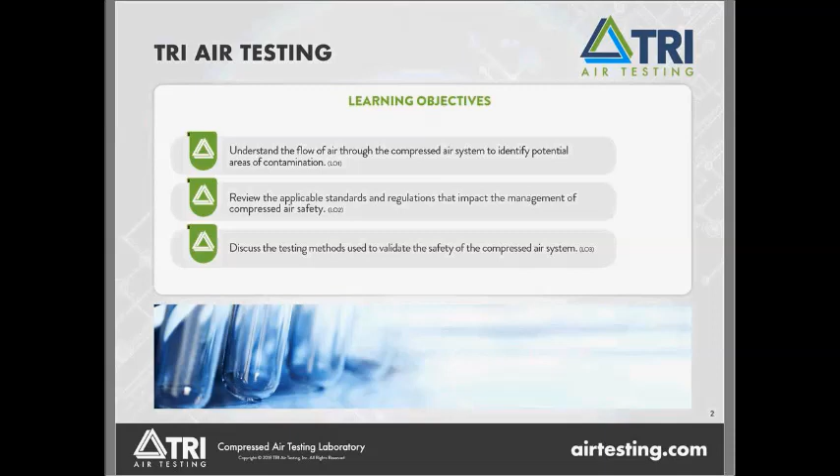So Christy already covered their upcoming events. Today we're going to talk about understanding and monitoring compressed air systems in the food processing environment. We really wanted to do it from a learning perspective and not have people out there just testing blindly because a specification or company document is requiring that testing. So to accomplish that, we're going to go through a couple learning objectives. We're going to teach you guys how to understand the flow of air through your compressed air systems, how to identify the potential areas of contamination, where those contaminants can get into the system, review any applicable standards and regulations that are currently out for compressed air systems, and maybe discuss a few changes that we know are coming around. The last thing we'll do is discuss the testing methods used to validate the safety of the compressed air system, how to collect all that data, keep it on file, implement it into your food safety plan, and have it available for any type of regulatory or CB audit that you guys may end up in.

To accomplish all that, we're going to do a quick introduction of our company so you know who we are, where we're coming from. We'll go through a compressed air system 101, show you all the components and pieces, talk of sources of contamination. We have a quick reference sheet for standards from regulatory bodies so we can see a little quick side-by-side comparison, and then we'll help you guys build your test plan by going through the test plan requirements, showing you when and where to test, how to collect those samples, how those samples are analyzed on the backside, and then how to compile all that documentation and keep it in one place.

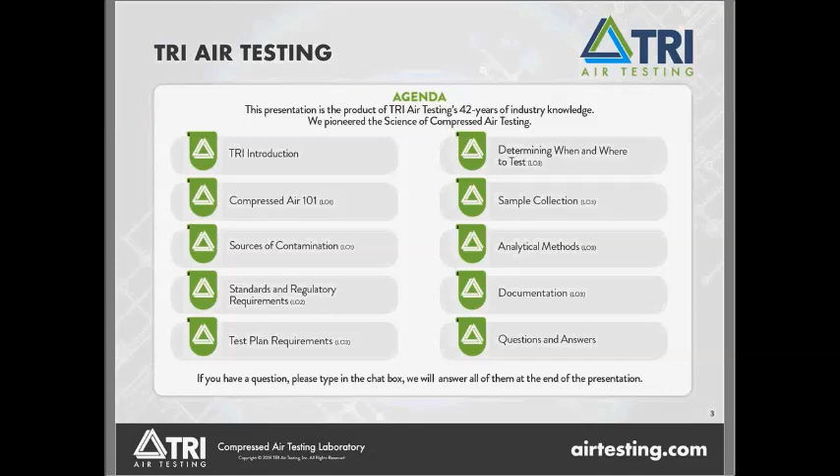So TRI air testing has been around since 1975. We started out testing primarily for the Navy doing diving air and created some proprietary sampling methods, some of which we still use today, some that we've improved on and replaced. And over time we went from dive air to firefighting air to pharmaceutical industry, microelectronics, so your wafer guys, and then I would say recently, at least for our company in the past decade, into the food, packaging, and beverage industry.

There's a saying at the top of this that says, 'Why trust the knowledge of a brickmaker about jewels?' It's from a book called The Richest Man in Babylon, and the whole idea of the story is a guy works hard, saves a bunch of money, and then invests with a friend of his who's a brickmaker to buy a bunch of jewels so they can make some quick money. And it turns out the guy who makes bricks for a living doesn't know much about jewels, and they get a bunch of colored glass and end up with a worthless handful of beautifully shiny beads and nothing more.

So we always tell people, there's a lot of talented people in your organizations. You work with a lot of other customers, but even a guy that knows environmental and ambient air sampling doesn't understand the differences to the compressed air system. There's some unique characteristics of compressed air we'll discuss today, so just take what we say with a grain of salt. If you've been told other things, we're happy to try to clarify that for you.

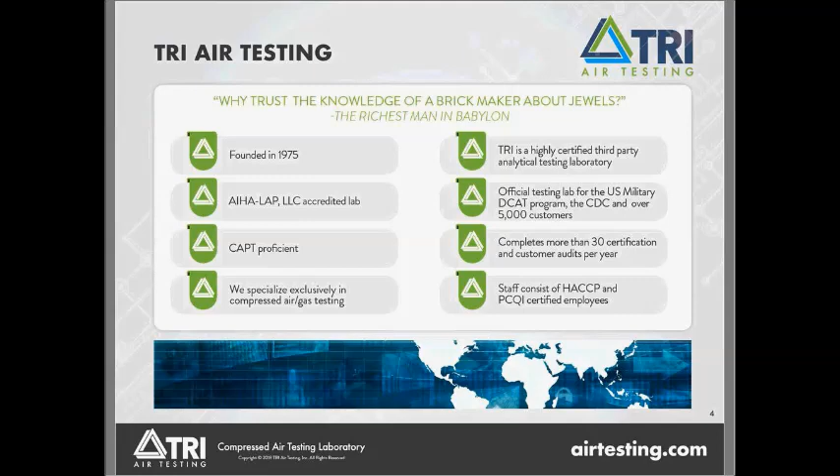TRI is very committed to learning and staying at pace with our customers, trying to understand their needs. So our staff, from sales down, we have people trained in HACCP, PCQI, very familiar with the SQF, FDA codes to assist you guys while you're trying to get answers.

So this is the point where we're going to jump into the bulk of the presentation. Like I said, the purpose here is to teach you guys and to do learning. So some people who already have a little knowledge of compressed air, this will start a little elementary, but stick with us, we'll try to get through it pretty quick. I just want to make sure everyone has that good basis, foundation knowledge for the discussion that's going to happen in the next 20 to 30 minutes.

Every compressed air system starts with one or multiple compressors. You can have 2, 3, 10 compressors, and they can all feed into a single system. Sometimes it's for redundancy, sometimes it's just for capacity. When testing, it's important to consider the number of compressors to make sure they're all online or cycling online to allow any sources of contaminants to be captured. If you have a single compressor feeding a single tank, you don't have much to worry about. If you're a larger facility staging 4 or 5 compressors, we have to take that into consideration.

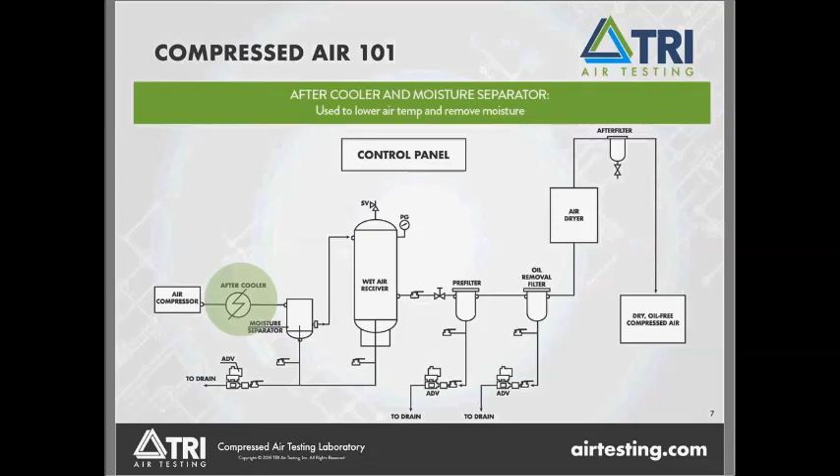So we hit our aftercooler, cool the air enough that our moisture separator and our receiving tank, which are your next two, can handle it. The receiving tank will help remove the water by allowing the air a chance to cool down as it cycles in and out, and then it'll condensate and everything will come down to the bottom of your tanks, and then run through these drain lines, hopefully with an automatic drain valve.

It looks like any other valve in a system, but it has a glass vial at the bottom with a fill line on it, and that fill line is an indicator that it's overfull. If that happens in your system, you'll start passing moisture or oil or whatever it's collecting down the line potentially.

Most plants have automatic drain valves. They can get stuck, so hopefully your maintenance guys have a maintenance check for that. If we find you have a moisture issue, that's generally one of the places we start looking to try to figure out what's going on.

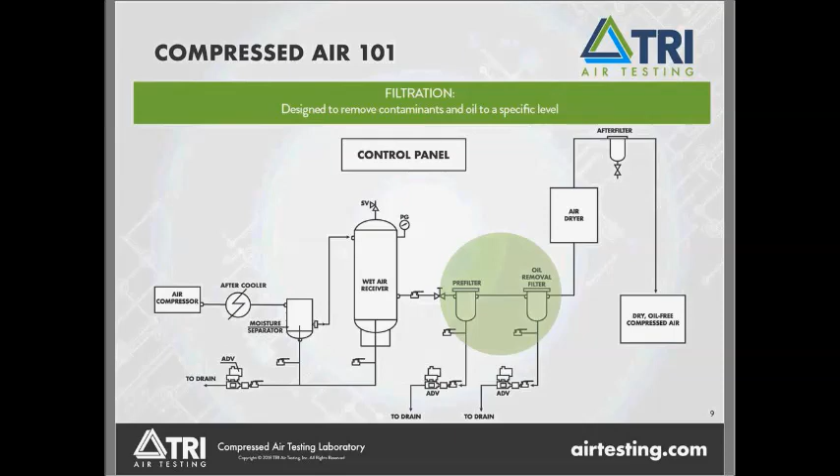Once the air is sufficiently cooled through all your moisture separators and aftercoolers, it'll run you through your first set of filtration. Filtration is designed to remove contaminants. Primarily you're looking at removing particulate, both viable and non-viable, as well as removing oil from the system.

Once you get the bulk of the contaminant removed and the air cooled, you'll hit your final dryer. The dryer is to get it down to your design characteristics. Typically we see two types of dryers in food plants: you'll see either a refrigerant dryer or a desiccant dryer.

These things can be multiple stages and can get a little more complex, but the basic ones are just a simple refrigerant dryer like an air conditioner in your car or house, or a desiccant, which is just a bead material that helps remove moisture. Once we get it dried out to the appropriate level, that's when it actually enters into your piping that runs out into your plant.

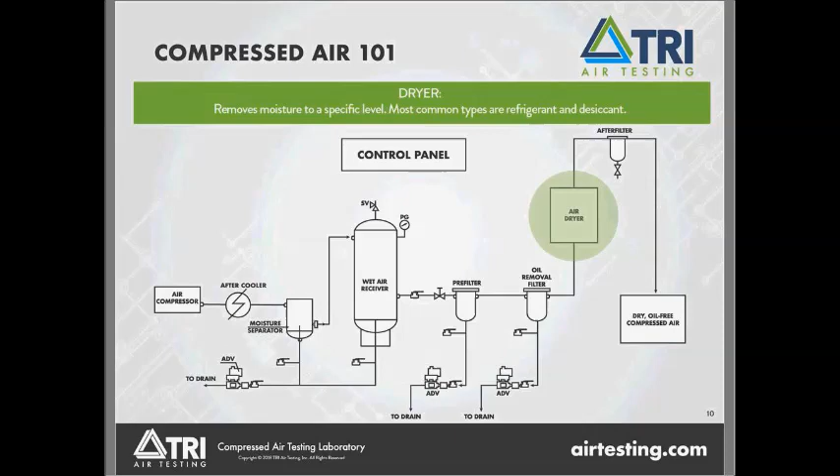And as it runs through that plant, it'll come down to your production areas, where generally you'll have some kind of after filter, point of use filter, final filter, just depending on the verbiage your maintenance guys or design team has used when they built this thing out. But this final filter is designed as your final safety step to make sure you have no particulate or oil getting past into your production, which is your final point of use.

Down here at the bottom, these filters are recommended at 0.1 micron for most food and beverage facilities, and a lot of that comes out of an old FDA reference where it used to be 0.3 micron, for removal of microorganisms we're mostly concerned about, based off their spore size. Now, because those are a little harder to obtain, 0.1 is kind of a default in the filter, so it seems like everyone's adopted 0.1 micron just to make it easier to implement.

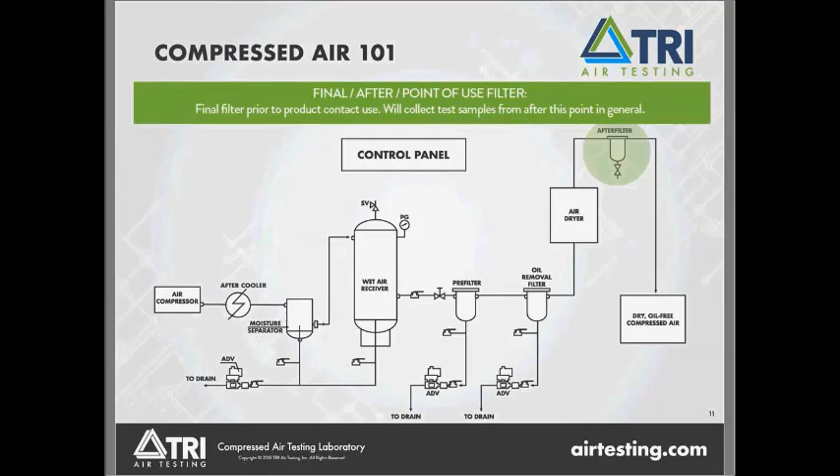So now that we have an idea of what this air system does, it comes in, compresses it, cools it, dries it, cleans it, and gets it out to your point of use. You can start seeing how this air is delivered, pure or clean, whatever word you want to use. The problem is most facilities will say, oh, we're not worried about oil because we use an oilless compressor or a water-cooled compressor, or our compressor has food-grade oil, so we don't have to test it. And ideally, it should have food-grade oil, and in an ideal environment, when maintenance has been upkept and everything's functioning, it shouldn't contribute any contaminants with those precautions already taken.

But the problem is we have two sources of contaminants. We have contaminants produced within the compressor, and contaminants produced from the actual intake of the air. So this is where it gets critical to figure out, where's my air compressor at?

Did they locate it in a room by itself with a fresh air vent that goes outside to an open air area of the building, which is ideal? Or is it located outside on a compressor pad right next to our loading dock, with big rigs parked next to it running all day, sucking all that into the air and delivering it to the system? Or is it just in some extra space found because of growth and expansion, now stored with all your ammonia and chlorine and whatever else is in the building?

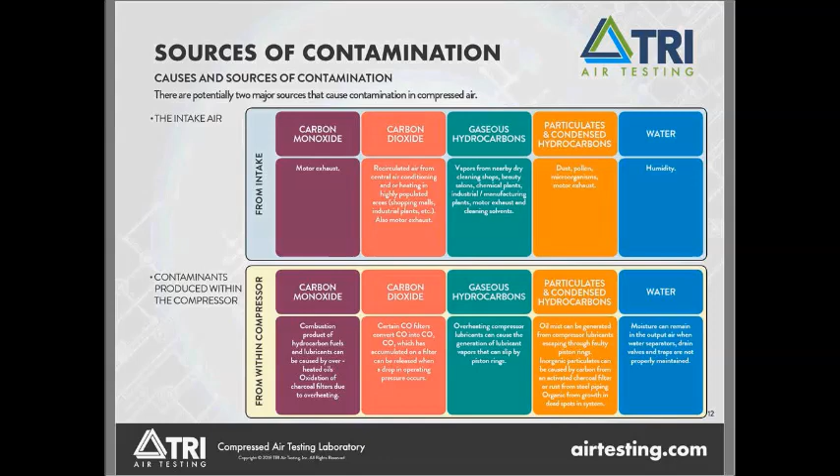So it's a lot of information to try to show you guys where the risk is coming from, where those contaminants can be picked up, and why we're even concerned with the compressed air.

There are a few standards that in the compressed air world we use, and then there's a few regulations that will relate to you guys. The number one standard that people reference in compressed air is ISO 8573-1. It's the only international standard for compressed air testing.

What it does is specify classes of compressed air with respect to particulate, water, and oil, and it basically gives us our test methodology—methods validated by an international community to say this is how you should collect the sample, this is how you should analyze the sample, and here's a rating system for it. Nowhere in these ISO standards is there a specification that says you must meet Class 1 air or Class 2 air.

They even have whole subsections—Chapter 6 is on gaseous contaminants, and they make no reference at all of classifying it. Section 7 is on microbiological. It outlines again a sampling method, but never does it qualify what a good pass-fail per industry spec is.

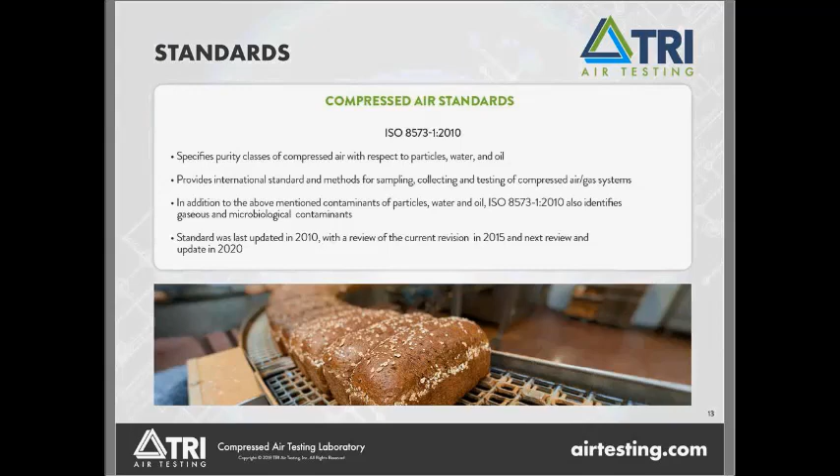Currently—we'll get to it in a second—there's really no one out there telling us that right now. So what we'll see from the ISO standard is they'll tell us how to collect the sample, they'll tell us how to analyze the sample, and then they'll give us just this overview of where to rate it.

There are compressor companies, filter companies, other labs that will recommend you push yourselves into these upper limits, but honestly a lot of times it's unnecessary. I mean, if you have a high-risk product—ready-to-eat, babies, or elderly—these could be more applicable to you. But the bulk of manufacturing and processing for food, this would all be a little bit excessive for air provided.

To give you a reference point, in a sterile environment, a medical device manufacturer making a pacemaker that's going to be inserted in the body in an aseptic sterile environment—those guys will test to what they call an ISO 7 clean room standard, which loosely correlates to a Class 4 air in the ISO 8573 standard.

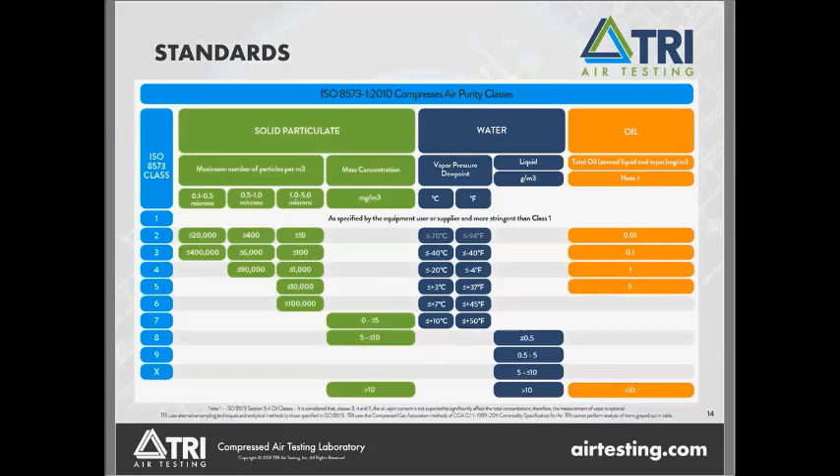So what we try to focus on: we use the ISO standards to help us create our collection methods, our processes for analysis. And what we try to focus on with the end users, the food and beverage packaging companies, is what regulatory bodies, what certification bodies, what are we being asked to do currently.

So we've created this chart that shows the three big ones we get asked about most here in the U.S.: SQF, current edition's the 8th, BRC, FSMA. And then we've come down here and made a couple indirect and direct product contact recommendations, and we've also compiled an average of everybody in the food beverage sector and what ranges we're seeing that they're asking for in reporting—not necessarily what they're showing on the reports, but what they're asking for in their pass-fail type report limits.

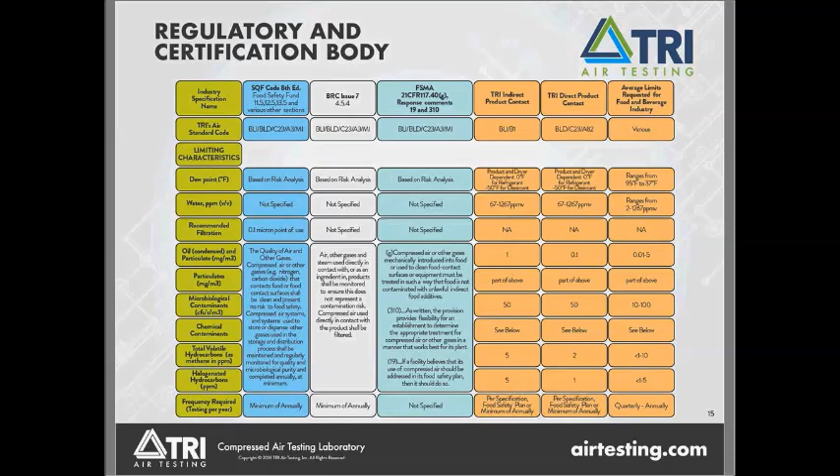So SQF, I think I have broken out in a couple slides, so we'll go through that, and it aligns very, very well with any of the FSMA requirements that are out there. It's taken from GFSI, so it aligns very close with all of that. And any of these recommendations that we make here will meet or exceed any of these other requirements.

The SQF current edition has several sections that reference back to compressed air tests. Module 11, 12, 13, they all basically say the same thing. I'm not going to read all this to you guys verbatim, but basically what it's asking you to do is make sure that it's clean and presents no risk to food safety, and that it's regularly monitored, and the quality is acceptable for food safety hazards.

It's talking about compressed air and also compressed gases used for modified packaging, so your nitrogens, your carbon dioxides, things like that. The recommendation is generally to test a minimum of annually, and consider particulate water, oil, and any type of microbiological contaminant that could be present.

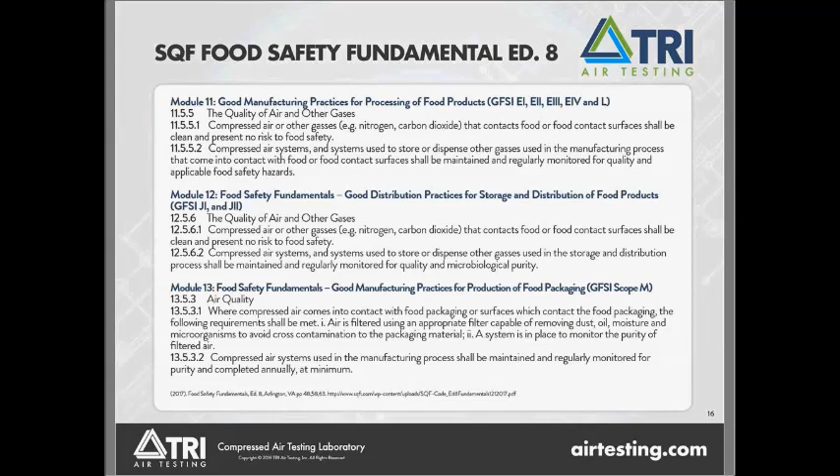Again, it's all a risk-based approach. There is some clarifying information on their website still available for people that want more. The biggest thing here is the recommendation for a 0.1 micron filter, and that your sampling methods should be appropriate. You should be collecting, of course, microbiological and aseptic method, and using adequate sampling equipment for compressed air systems.

This is what I mentioned earlier, where atmospheric sampling is generally not appropriate for compressed air systems. The difference in pressure and flow from a compressed air system, just the nature of it, is going to render most atmospheric testing methods useless.

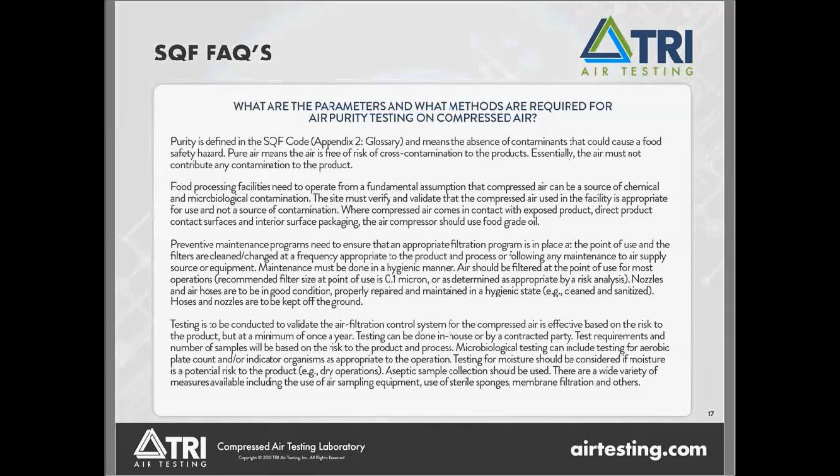The air is either going to blow by the sampling media that you're trying to collect on, or through Venturi effects will get disseminated throughout the air, so at best you'll have a blended air sample. What you really want to focus on when sampling compressed air is collecting it in a controlled, sealed environment, so you know you don't have any cross-contamination or possibly bleeding out contaminant and not even capturing it on your sample media.

So we've kind of rushed through a lot of information about the 101 of a system and the specifications and the regulations, to try to give everyone a good baseline to understand this last part, which is honestly the more important part of the webinar.

How do we take this system that we have and these requirements that we have and build that into something that we can use? The thing that drives me nuts the most is people will call, test, get a report, and have no idea why they're testing, what they're testing for, or what the report even means once they get it. Generally it's because they don't have the basic functional knowledge of the system, or understanding of what they were originally looking for, because they didn't come up with a test plan and didn't do a risk assessment of their system.

So this process we're going to walk through is just a good overview of how to get through all that, and then how to get to the end result and what those results actually mean, so that they're usable for you in the long run.

So test plan development, current quality guidelines is generally a great place to start for you guys. What I mean by that is any corporate documents you guys have on your internal quality specs. I pull all that, whether it's environmental or anything else, and bring that in. If you have an air quality spec, if you're fortunate enough to have that, great, reference that. If you need help understanding it, send it over. Our team can help read it for you and break out what it means to you.

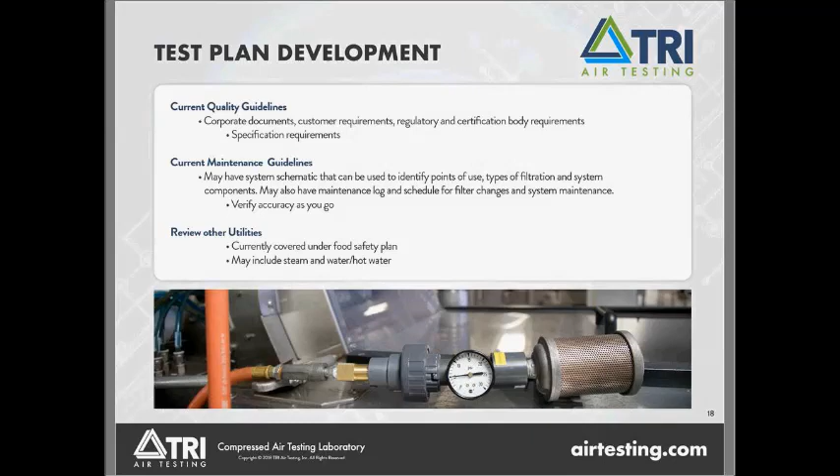Is this something we're doing annually? Is it something we're doing daily? What's the risk that we're identifying there? And then see how those translate to your air system, and we can kind of marry all that up so your utility systems are all basically on a very similar plan, and your whole risk assessment stays in a very logical manner. You're not doing some one-off weird standard testing just because it's a system that wasn't originally considered.

So after we have that background information, we're going to want to identify the uses of the compressed air in your system. Again, this is part of the risk assessment. The more the air touches the product directly, the more risk there is that if there was a contaminant, it would spread to the product.

So in order of risk here, direct product contact - air that comes into contact with the product or the interior of a product package - is generally considered direct product. It's the highest risk. You can also consider in this exhaust from certain pneumatic components.

So if you have a bunch of pneumatic valves that are just exhausting and blowing right onto the final product line before it goes to packaging, well, all that exhaust air is now coming across the top of the product, and so you should look at your compressed air in that area.

We have a couple of guys who will get to this final point and say we have no contact, we just have process air, which is air used for valves, actuators, pneumatic components, so we don't have anything to worry about, so we're going to say we have zero risk. For the most part, that could be true as long as they're considering all their exhaust ventilation.

If it's closed off, sealed, and it's not venting into the product, then there's a good chance you can say, hey, we just have process air, here's our system diagram, nowhere is it coming in direct contact with the product, nowhere is it coming in indirect contact, meaning we're not blowing off conveyor belts after a CIP or something to do the final dry, and then the product's going to run across that surface later. You might be able to risk assess it out completely if you're really in one of these non-contact or process air type situations.

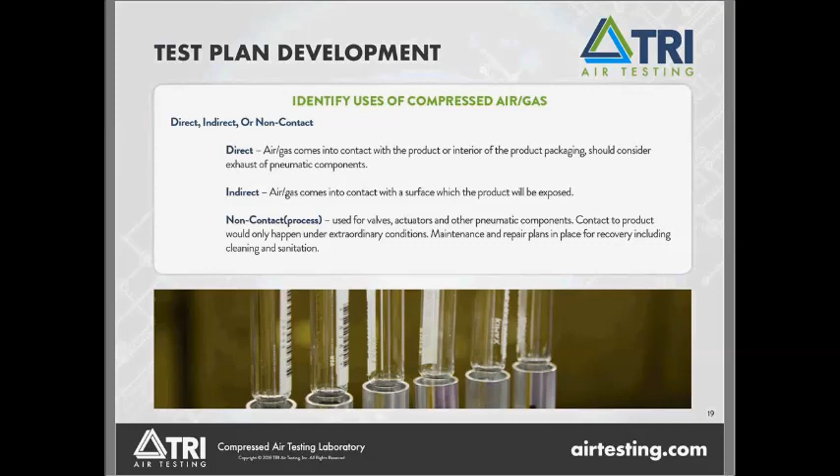So once you identify the type of air contact, you're going to have an idea of where your points of use are already, because the only way you're going to figure out what type of contact is to figure out where they're at. So as you're figuring out these points of use, what you want to record for each one is the location of the point of use, and it could be by valve number if your maintenance team has decided to label each valve by number.

It could be by line number or equipment that it's hooked up to. You just want a reference that is reusable and common knowledge in your facility. So don't come up with a custom naming system for these valves and expect someone further down the line to come back and reevaluate or apply this program. Try to use common naming conventions. If you don't have them, get with your maintenance team and come up with it at that point. They generally have a pretty good system for naming valves.

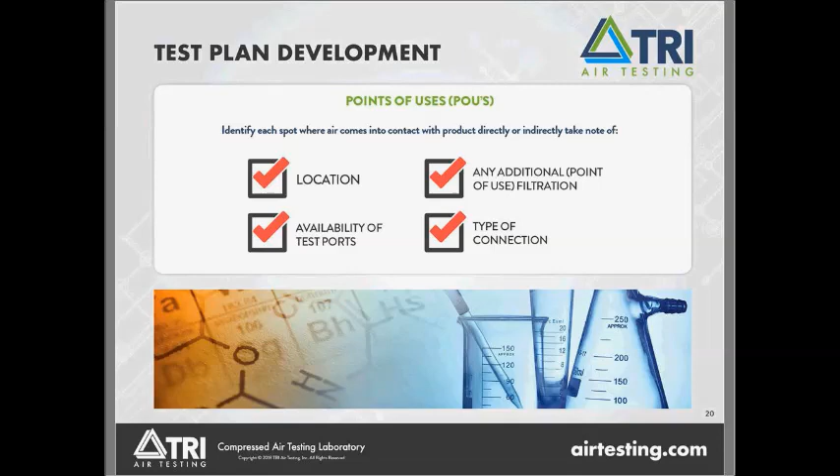The other thing you're going to look at is any additional filtration hooked to those locations. So at your point of use, your final filters, is there a 0.1 micron filter in place there? The availability of a test port - is there somewhere I can hook in test equipment to sample and collect this for analysis? And if so, what type of connection is that? Again, you'll probably need some help from your maintenance guys if you're not very familiar with this, but getting this basic information will make this process smoother for you in the long run.

So after we've done all this legwork and research, the last piece is identifying the compressor and system components from there so we can help make sure it aligns with whatever specification requirements you have. It's pointless, and we get people calling in all the time saying we just want to test our air and see what it is. Well, we're happy to take your money and let you test blindly, but it doesn't benefit you at all.

If you haven't done the fundamental work or don't have the knowledge when we ask you questions, you may not even need to test, because we can tell you, hey, we have no filtration, we don't have a dryer, we're just running it straight through the compressor. Well, we can tell you you're never going to pass any reasonable moisture spec. What you need to do is address the drying in your system to at least a minimum standard. So sometimes we can get you corrected without even having to test initially, and then use the testing to validate the changes.

So we worked backwards to forwards. We looked at the overlay of the plant, how the system's laid out. We worked from the point of use, because it's generally easier to figure out where air is being used in the plant. Then we work all the way back and identify the type of compressor, filters, dryers, and type of piping. Is it stainless steel? Is it aluminum? Or is it an old cast iron, which is going to flake off and have a higher particulate risk?

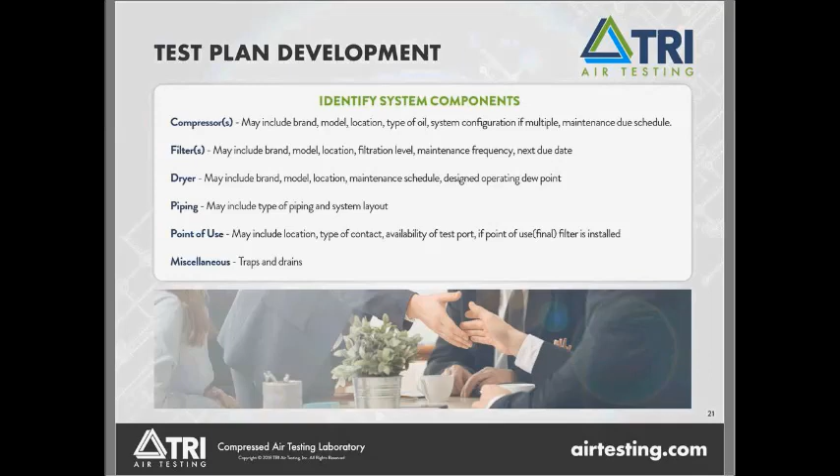That's just something we need to be aware of when doing our risk assessment. So keep compiling all that data, and then we have to figure out our risk - is it pretty low risk, or high risk because we're a ready-to-eat product and don't have any moisture separators or filters? Then you come down to figuring out your sample collection. How are we going to test them? We know what the system does, we know our risks and the possible contaminants, we know what controls we put in place to limit those and where we're using the air. Now we have to figure out how and when to collect this sample.

When is generally specified by your certification or specification requirement, in conjunction with your risk assessment. So if the certifying bodies or FDA say minimum of annually, consider this - we know at a minimum that's our starting point, we're looking at least annually. If you're changing out filters every 3 months, you probably need to align that with your maintenance cycle and look at your testing on a quarterly basis when those filters are changed out.

Where to sample should be pretty easy now because we've looked at the point of use, so we know we want to test down by those points of use, and I'll explain that in more detail in a second. Then we've got to decide which of those points of use we're going to test. Are we going to test all of them, which is a great way to develop a complete baseline of air quality? It's very common practice in our pharmaceutical industry - not something we see very often in the food industry unless you're producing with sterile air.

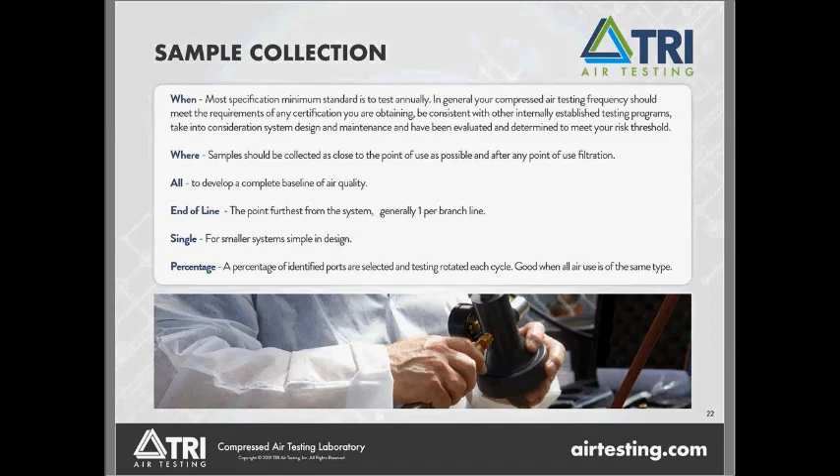That approach is pretty commonplace, honestly, in anyone using a more sterile type clean air environment or pharmaceutical air, and maybe if you're in a higher risk scenario when you do your risk assessment and the appropriate model. But 99% of you guys are probably going to end up in this end of line type testing where you're just looking at what's going on in the whole system.

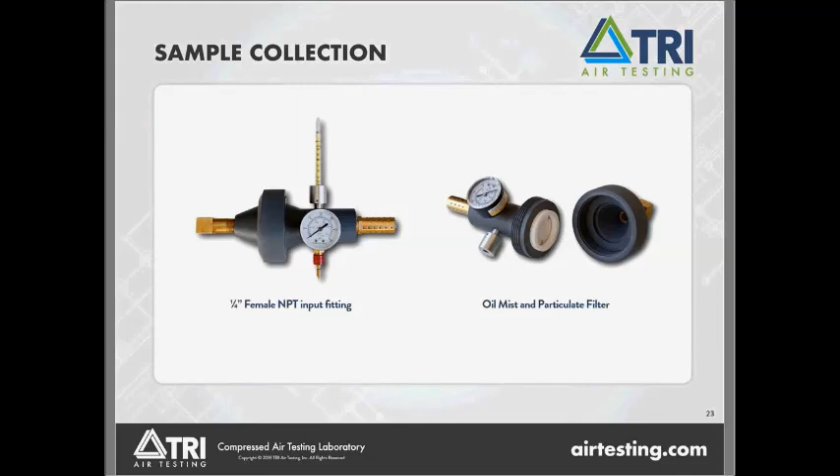And then the picture on the right just shows the unit opened up, and that white disc inside is the actual filter that we'll use to collect your particulate and oil mist samples on. Same type of filtration that you're putting in your system, just multi-layered, compressed, and at a much smaller micron rate than what you're going to have installed, to allow us to capture everything.

Once we've done that sample collection and we've figured out what your limits are, we've gotten you a report - that's the part where most people fall off. They've done the work, they've checked the box, yes we test our compressed air, but then they stop. They don't finish the process and do anything useful or meaningful with that analysis. The final step really is coming up with a way to use that data that means something to you.

And so in the food industry, and honestly most non-sterile industries, when there isn't a hard specification - you're not getting told what your breathing air is, like OSHA tells you exactly what you have to meet for breathing air - then you have to do one of two things. You have to come up with a risk assessment, look at your baseline study, that first analysis you took, look at all the components, your dryer, filter, what they should be controlling at, what the design intent of our system is, and then establish a critical limit and compare your results to that critical limit.

Set a deviation, and if it exceeds that, something's wrong with the system. We need to make a correction and we need to retest.

The other option, and in the food industry we see this a lot because most plants have been running for so long without testing air, is to create a historical trend analysis. You may not have the historical data currently to allow you to do that, but what you do have is a ton of other data that shows the air has not been contributing to a safety issue, a quality issue, a stability or shelf life issue, or any issue to the product itself.

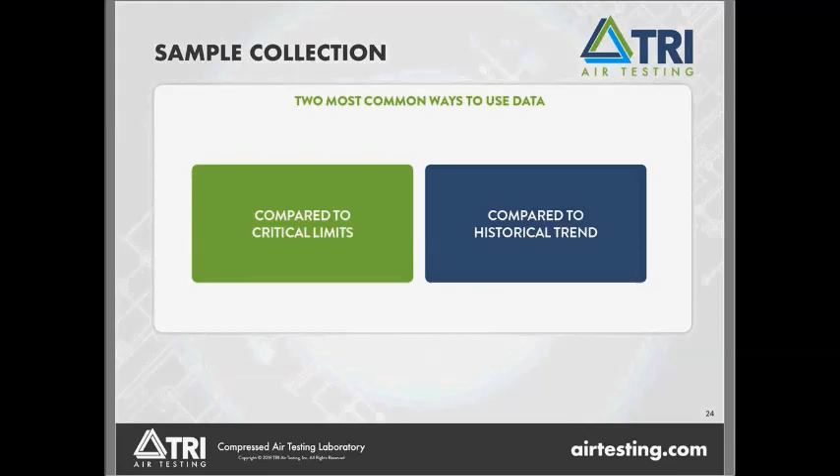So those are really the two best ways in the food industry to use that data to prove that that air is still in control and it's still doing what we want it to. The whole purpose of this testing is just to make sure that that air is still in control, that those filters and dryers are functioning as intended.

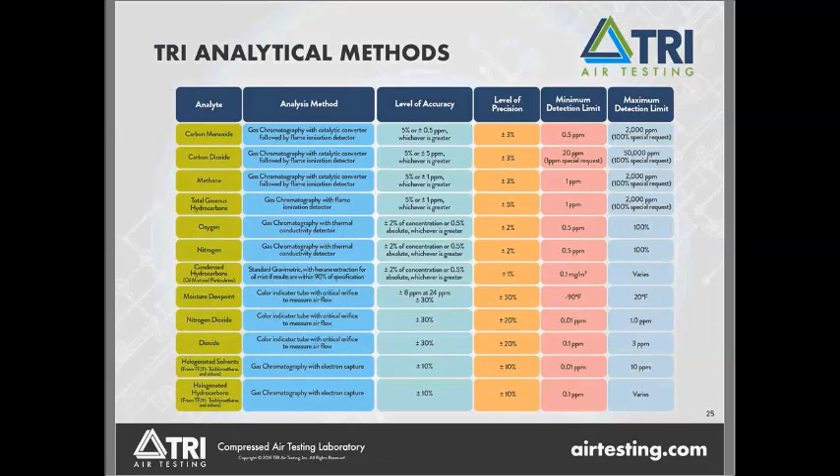This is a pretty complex slide that basically shows all the things we can analyze. It'll be available on the YouTube channel when they release this. If you guys have more technical people that want to read through it and have questions, we're happy to answer all that, but we're going to blow through the highlights that will matter to most of you.

So oil mist, condensed oil, we can test that down to a really low limit. It's 0.001 milligrams per cubic meter. It's essentially an oil-free rating.

Moisture is tough in compressed air because it's tough to transport an air sample without it picking up or losing moisture content due to a bunch of environmental conditions. So we use a color changing indicator tube that we send out, and you actually make that reading on site and record your reading and then send it back in and we validate it from there.

From that we'll calculate your dew point, so we'll be able to tell you it's running at 0 degrees Fahrenheit or 40 degrees Fahrenheit, which is acceptable for a refrigerated dryer system. So if you know you have that, we say, yeah, that's in line with using a refrigerant or a desiccant system. It doesn't look like you have anything to concern yourself with.

People who are more susceptible, who aren't running the right oils yet, or have their compressors located in a higher risk environment, like near the loading dock, halogenated hydrocarbons, oil vapor, oil mist, can also be collected with a charcoal tube, and we can inspect that and give you a rating for that also.

And then the last thing we typically look at for food is, of course, your mold and bacteria sampling. We use a kit that's very similar to the one I showed you guys, except the front half of it is detachable, and sent out to you in an aseptic manner. It's all double bagged and vacuum sealed, and you'll hook it directly into your system with the input fitting attached on it already, collect the sample, rebag everything, and send it to us.

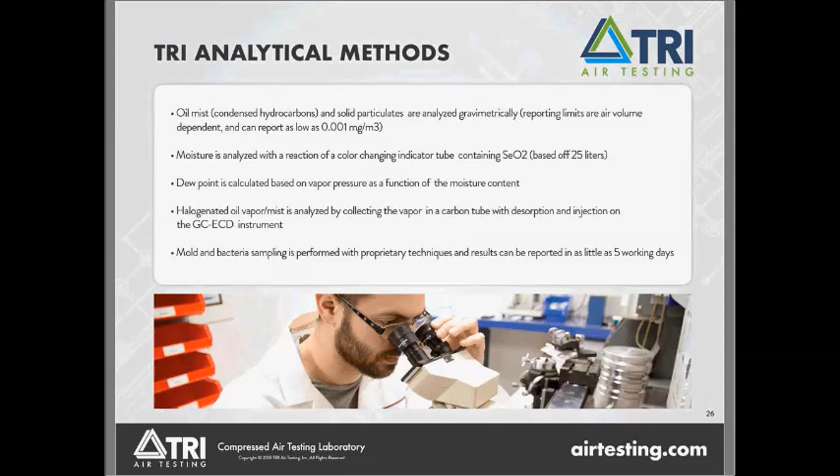The final part of this is packaging all this together with documentation. There's several things we need to do for documentation, and it actually looks like these slides got flip-flopped.

So for documentation, you're going to want a system diagram. You're going to want some kind of system information sheet, where you're keeping track of types of compressors, filters, what's the point of use, and what's the maintenance schedule. You should also have some kind of SOP or something from your safety plan. We have samples of all this stuff we can send out to you guys if you need.

Once you get all that done and have your SOP written up with your sampling points, you should have your testing report. You should have a lab certification from a certified lab. There are two of us in the U.S. that are certified that I know of, and probably about half a dozen that aren't, that kind of do it out of their truck. So just be careful when you're doing that. It should be no big deal for a lab to send you a copy of their certification. And then whatever you're using to compare those results to, whether it's a critical control point, a historical or trend analysis, you should have that data included also.

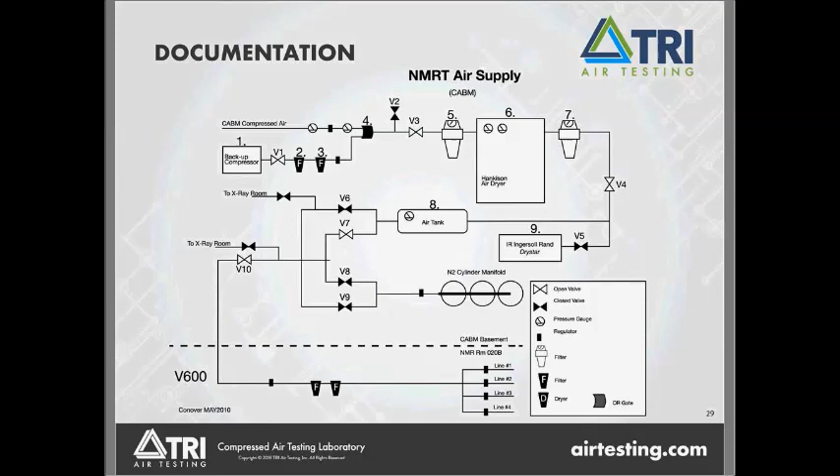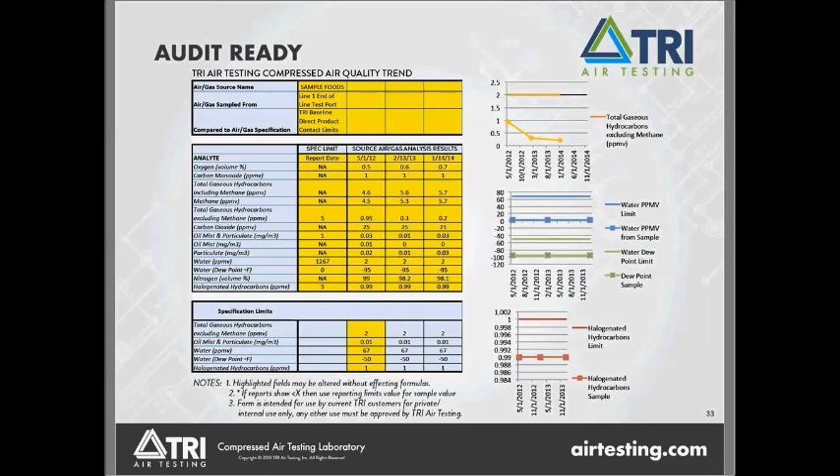A copy of a sample report, again, we're happy to send you guys so you can see what they look like. These can either be a pass-fail type thing if you set limits, or just something quantitative, reporting the actual data from the source point, if you have your own limits to compare it to or a trend you're doing. Certifications, like I said, you should be able to get those without any issue. This is a trend analysis. We have an Excel form we can send if you guys need something or are having problems creating one.